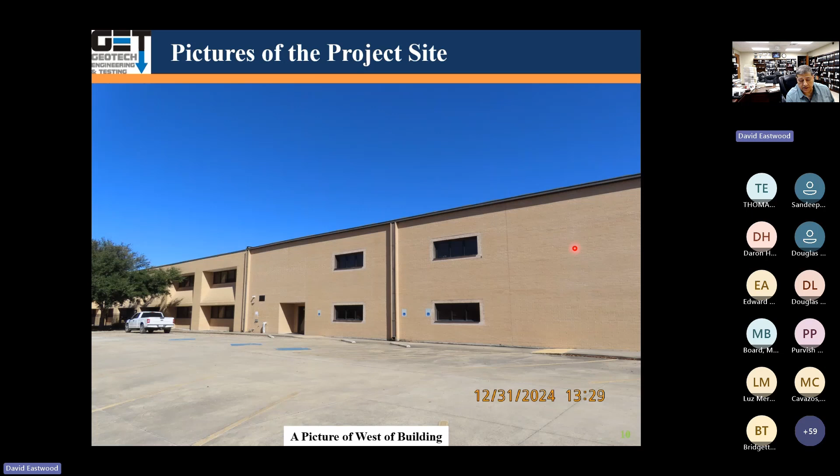If you have questions, again, type it into the Q&A section or chat. The project site is in South Texas. It's an addition to a middle school. Now let's go over the project timeline.

The agenda is the project timeline, site visit, field exploration, laboratory tests, engineering analysis, reasons for distress, repair techniques, and recommended additional studies.

Timeline: they did the initial geotech report in 2008, which was wrong, the geotech report. They did a civil report in January 2009, and all the drawings were done in 2009. The addition to this project finished towards the end of 2009.

We were engaged in December 2024, because the client was saying there were a lot of problems on this building, a lot of cracks and movements. We did a site visit in December 2024 - that was New Year's Eve, by the way. And in 2025, we did a bunch of testing and a report.

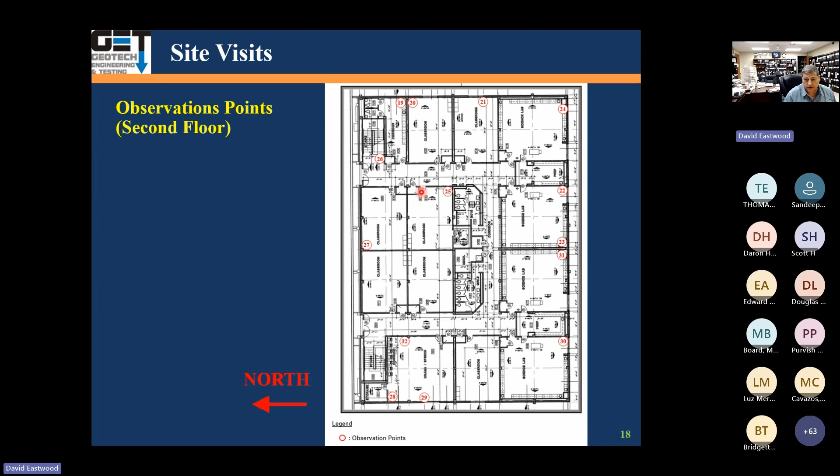So, observations of the exterior of the building. This is a brick veneer structure. The joint spacing in the brick is about 30 feet here.

The brick joint for a typical building like this should be about 20 feet, not 30 feet. You go look at the building itself, some of the sidewalks have heaved up.

We've got negative drainage towards the building, and of course, the gutters are dumping water right on top of the sidewalks. This whole area was wet.

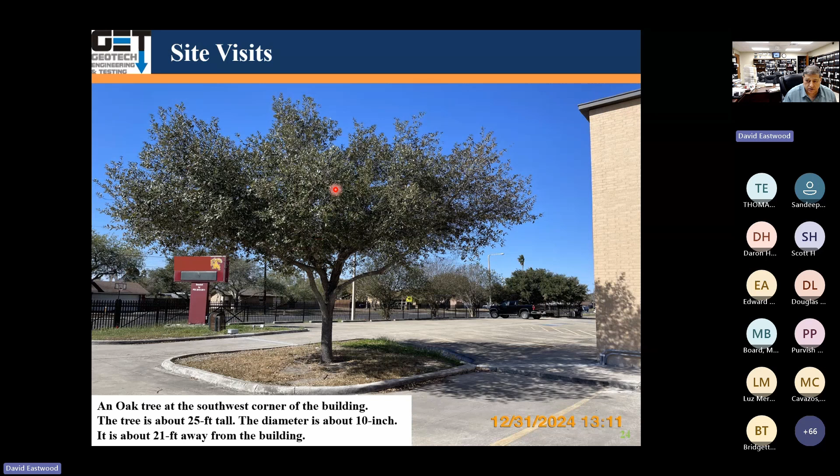There was this little tree out here, not too far from the building. It really doesn't affect it right now - it's about 25 feet tall and 21 feet away. But once this oak tree gets bigger, it's going to cause foundation problems with the building.

If you go outside the building and start looking at it, you see these cracks in the brick, more cracks in the brick.

This is the other side of the building. The brick joint here is about 20 feet, which is fine.

They removed this window frame deal around the building because of the movement - it got loose and fell down, so they didn't want it. If you look at the previous pictures, these window frames have all been taken out. Because of the movement, they were afraid the window frame was going to fall on the kids, so they removed it.

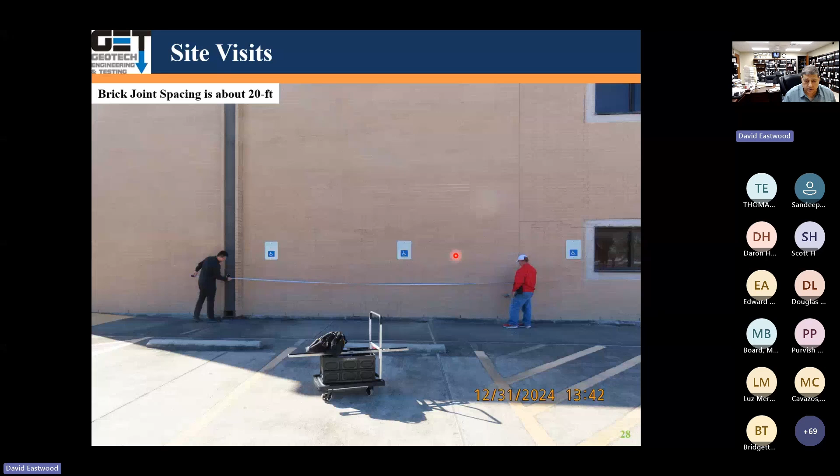Here are typical cracks on the exterior of the building. In the brick, the window frame was removed. Here's another one, window frame removed.

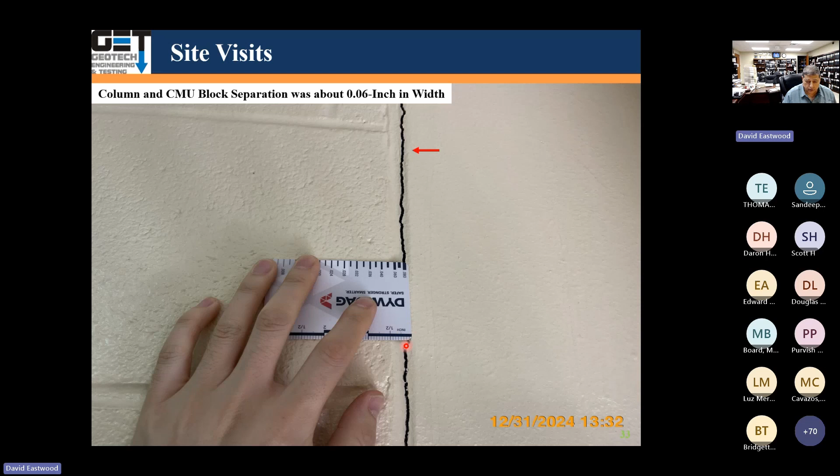Inside was pretty bad. You could see between the column and CMU block joints, a lot of movement. The columns are moving - they're supported on drilled piers. A lot of separation, about 0.06 inch separations.

A lot of sheetrock cracks, CMU block cracks. More CMU cracks. Stair-step cracks through the CMU.

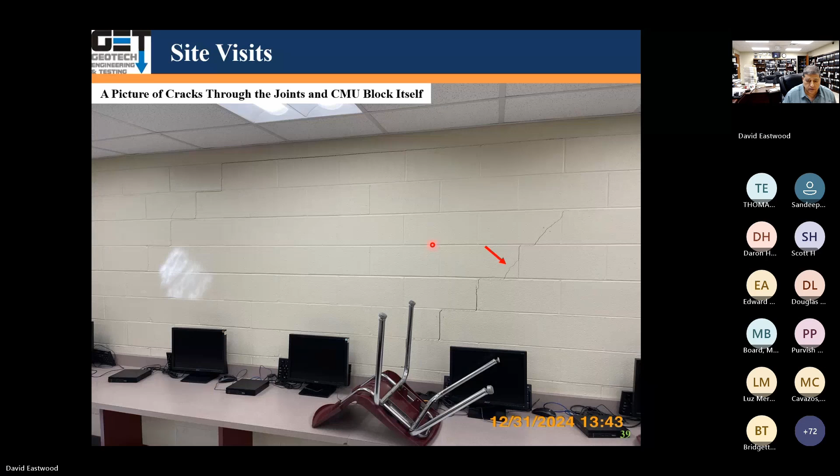Separations again between the column and CMU block. More CMU cracks. You can see more separations here, and more cracks here.

More cracks here. We checked the plumbness of the walls. The walls, for the most part, were pretty vertical - there was some deflection, but not very much.

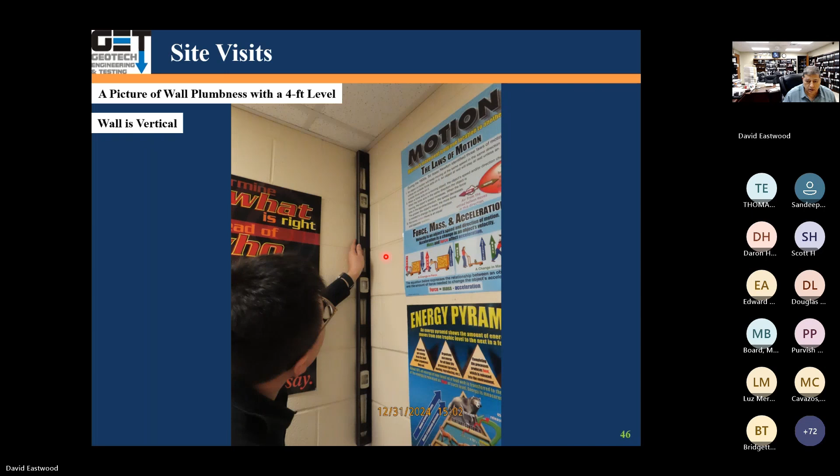Again, we see the cracks, and we check the plumbness. More separations between the columns and the CMU blocks. See cracks right there. Again, here, cracks in the CMU block corner area.

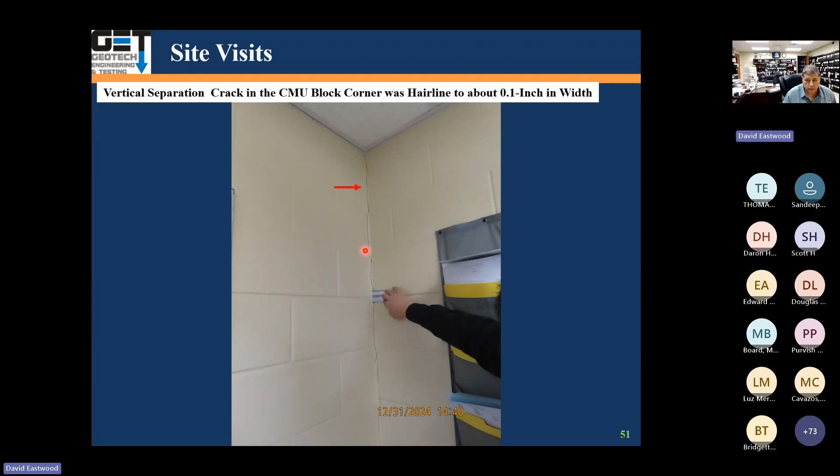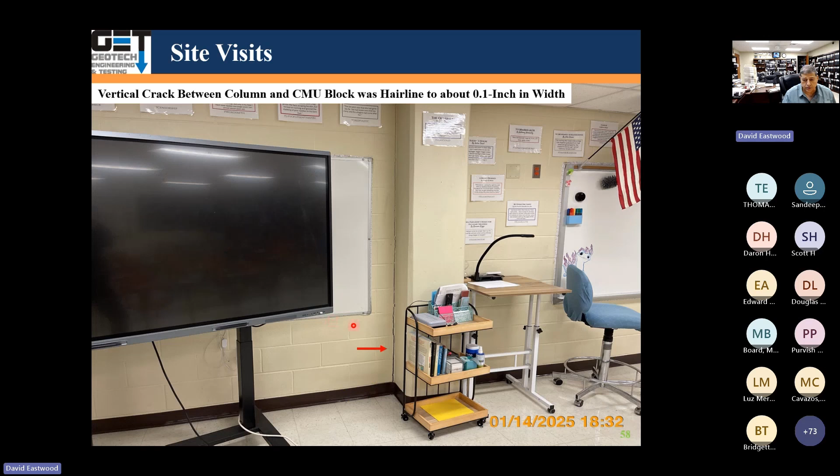See the stair step cracks, separations between the columns and CMU walls, more cracks here in the CMU. See the crack in here. Here again, you can see the separations. More cracks—this was throughout the whole building, first floor and the second floor.

Foundation system consisted of drill piers, a bunch of drill piers in here. Basically, the design was the drill pier with concrete strength of 2,500 psi at 28 days. The geotech said put the piers 13 feet deep. Here we have really fat clay, really hard fat clay all the way down, and of course this is South Texas, really dry.

Underreams here: 16, 36, 18, 50—18-inch diameter shaft, 50-inch diameter bell. Some of them are 24-inch shaft, 60-inch diameter bell. Some are 30-inch diameter shaft, 78-inch bell, at a depth of 13 feet below finished floor. Okay, below finished floor.

The floor slabs had 8-inch void boxes under the floor slabs and in the grade beams, which was good.

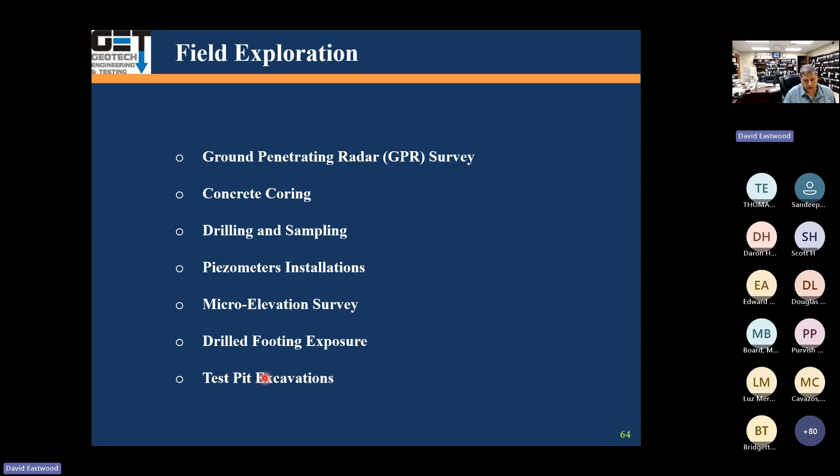Field exploration: we did ground penetrating radar, GPR, concrete core drilling and sampling, installed some piezometers to measure where the water is. We did micro elevations, drill footing exposure, and test pits for the piers and the grade beams.

We did 4 corings of concrete floor slabs, 4 borings inside and 3 borings outside, and GPR at 7 locations where we cored the concrete. These are the borings outside to a depth of 30 feet. The borings inside we tried to get 20 feet, but these 30-foot borings outside were in the parking lot.

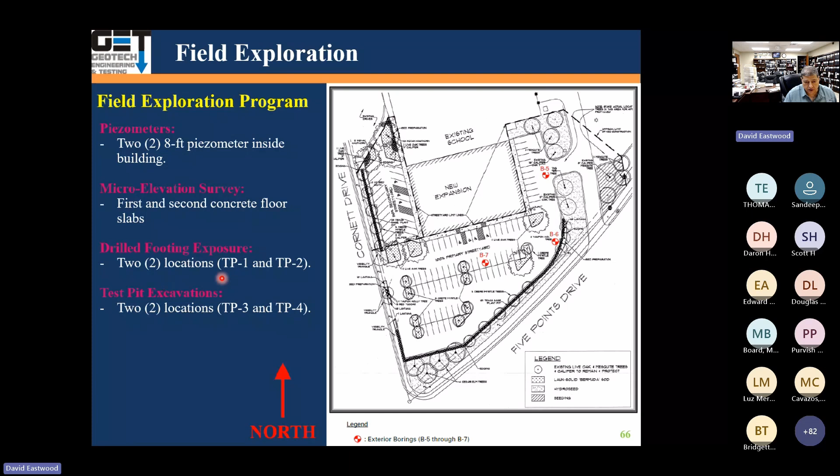They were covered with concrete. Then we had test pit excavations, 2 locations with drill piers and 2 locations for grade beams.

GPR, as you know, basically uses an antenna that transmits electromagnetic energy similar to what cell phones are. It's got a receiver within it, and it receives a reflected signal that it sends out, and when it encounters soils with two different dielectric properties.

GPR was conducted at 7 locations in the floor slab areas to basically perform a standard borehole clearing. It looks like a lawnmower—you just run it on the floor slabs. We did it inside and outside. Here's the GPR doing it inside, kind of locating where the steel is.

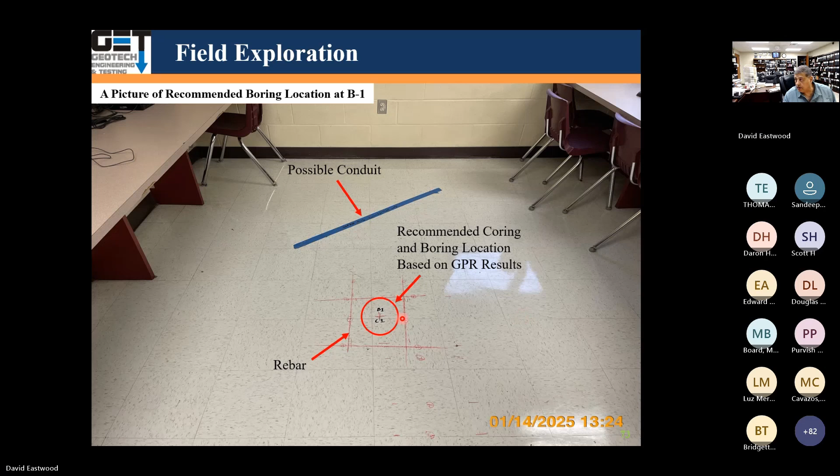This is the hand device. We locate the borings where we don't have to go through the steel or possible conduit, since we didn't want to hit the stuff on the bottom. So we locate the boring locations—again, let's see the rebars in here, conduit.

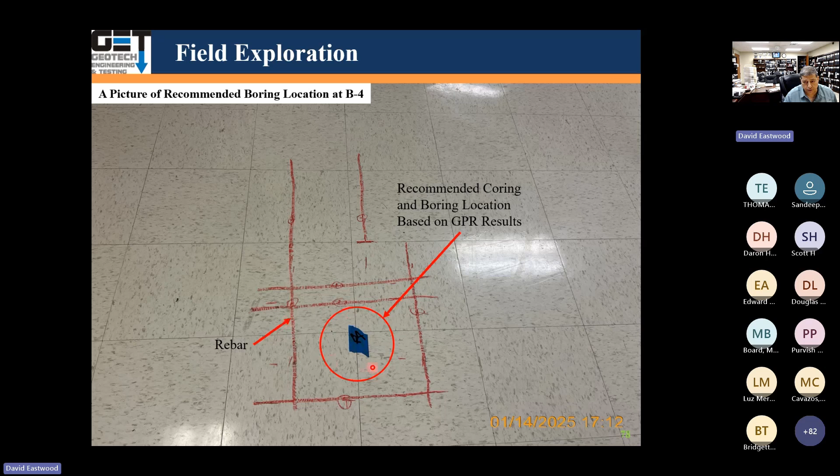Here's another location, this is the boring location, these are the rebars—recommended coring location. Here's another location; the rebars are over here, so we did the borings where there's no rebar. We also did it in the parking lot. Location of the cores where rebars are around it. Here's another location—7 locations total, 4 inside, 3 outside.

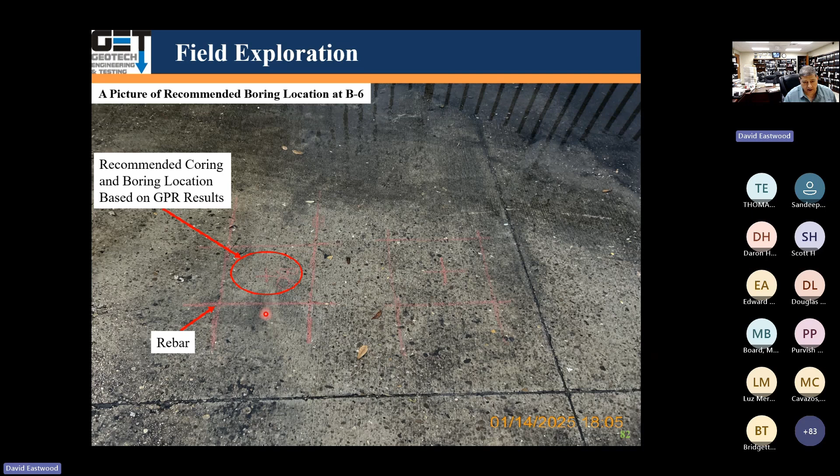4 boring locations inside and 3 boring locations outside. Here's another location. This is where the steel was. This is the boring location.

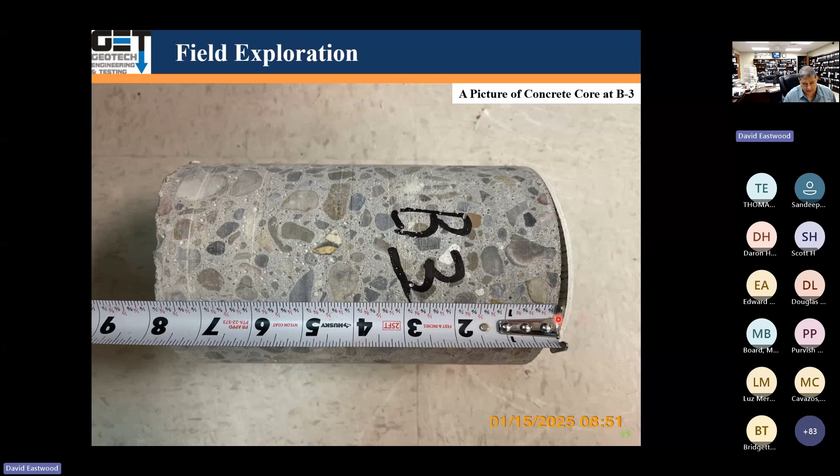Concrete coring: we cored inside and outside with the concrete coring device and got the cores. Here's about 8-inch concrete thickness inside the building—another 8-inch. It's a structural slab with 8-inch voids, and piers are supposed to be 13 feet deep. That's B3. Boring B4, 8-inch. So consistently we had 8-inch concrete thickness inside.

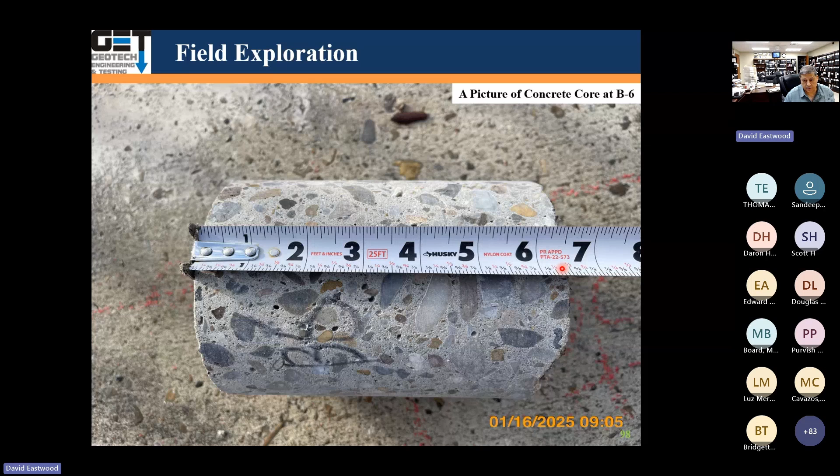This is the parking lot, B5, 6 inches. 6.5, 7 inches outside at B6. B7, almost 6 inches, 5.5 inches.

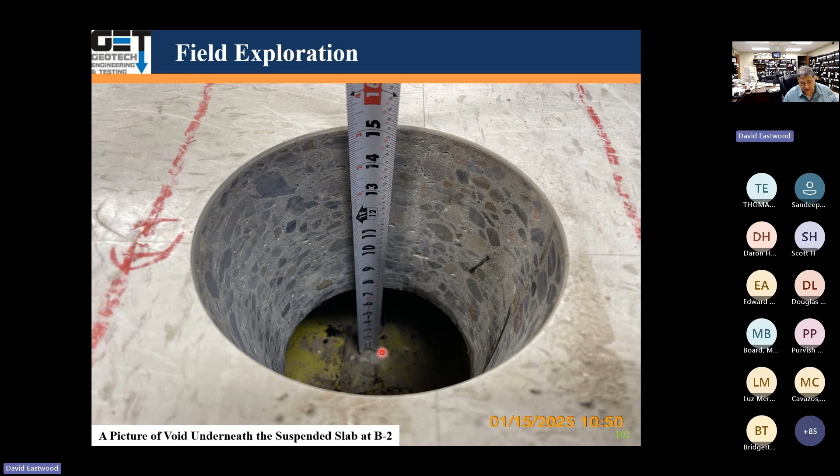Here's about a 7-inch void. So the soil underneath the slab heaved non-uniformly—some areas it moved 4 inches, some areas moved 1 inch. You can see the 7.5-inch void, which means the soil only moved 0.5 inches.

Here's another void, in B3—there's a void under the slab, about 7 inches. Void in B4 is a void, vapor barrier, natural soils—something about 4 inches, 5 inches void. Here it is, about 5 inches.

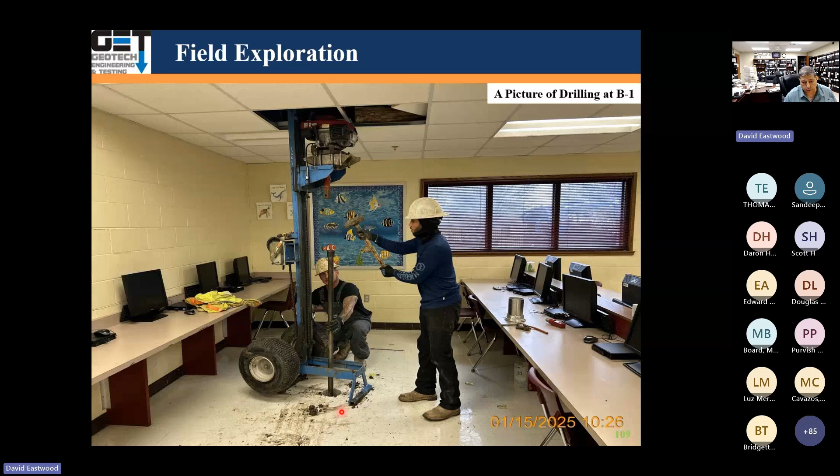After we cored, we did the borings using our portable rig system, which is gasoline operated, to get samples. We measured the water level after doing the borings and didn't find any water in any of the holes.

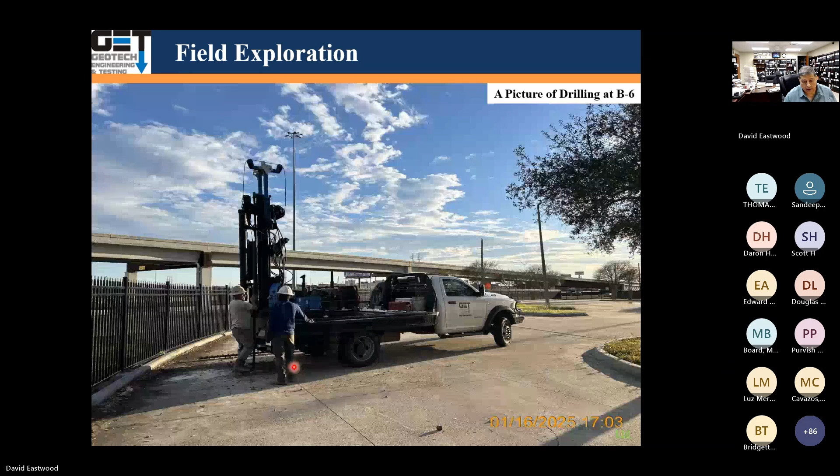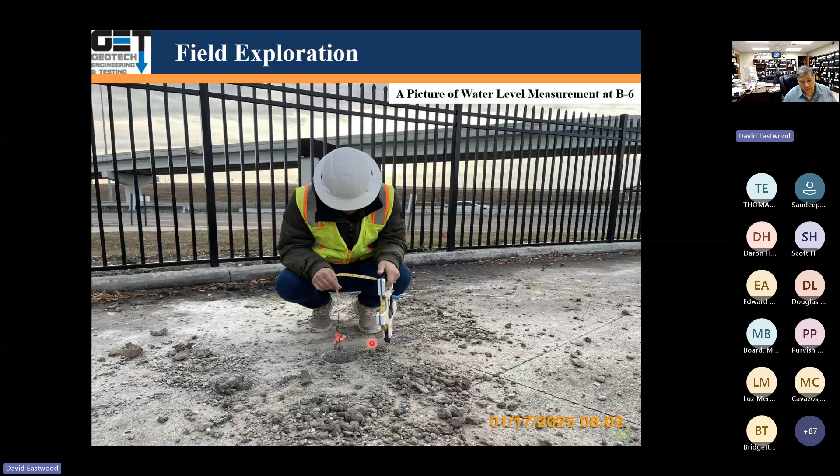Then we did exterior borings with our truck mounted rig at 3 locations to a depth of 30 feet. We got soil samples, and it was all fat clay. We measured the water level and there was no water 30 feet below the parking lot, so the water table here is pretty deep.

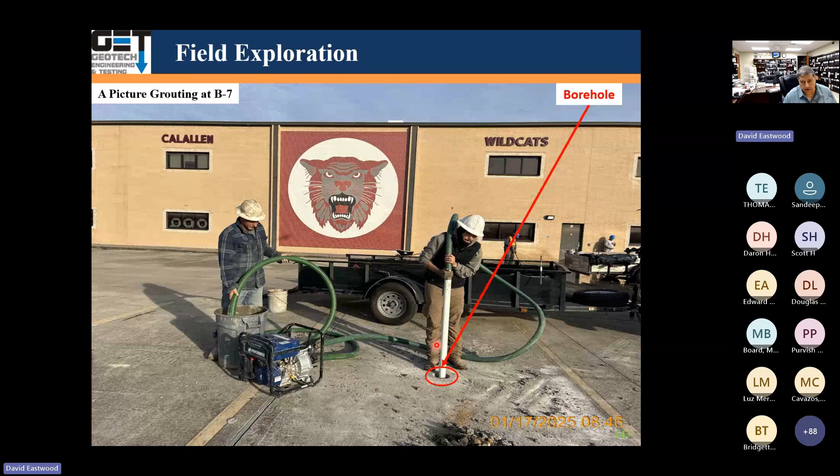At the finish, we grouted the holes with a mixture of bentonite and cement, mixed together, and grouted the holes from bottom up to fill them. These are in the parking lot. We checked with the probe to make sure the concrete was totally filled, and checked to make sure the grout didn't fall out into the holes. That's the grout.

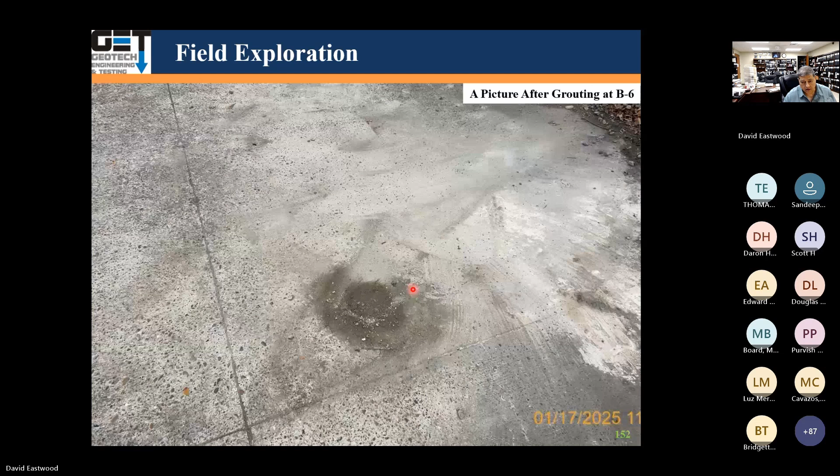We also installed 2 piezometers, one here and one inside the building on the first floor. These piezometers were about 8 feet deep, and we had the screen here. Around it we put sand, and above that we had bentonite, with a cover on it. We didn't find any water in any of the piezometers.

These are 2-inch diameter PVC pipe. We drilled a hole, put the PVC pipe in that was perforated with holes in it, put the piezometers in, put sand around it, then bentonite around that, and put a steel cap on it to measure water levels. You can go back and measure the water levels anytime you want.

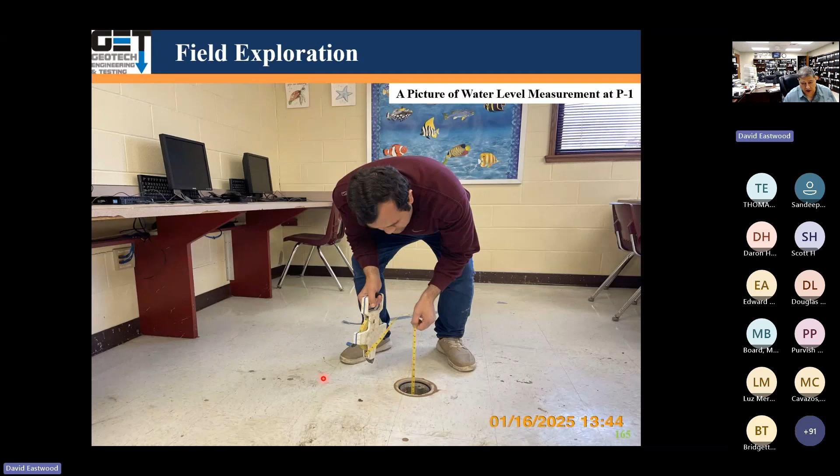They did a leak test on this building, and there was no leak anywhere. We measured the water levels in the piezometers and found no water. P1, P2: dry, dry, dry.

We ran micro elevations to define the deflection on the slab based on what the FPA, Foundation Performance Association, allows, as well as the Post-Tensioning Institute. Here you run the micro elevations and can read what kind of elevation you got.

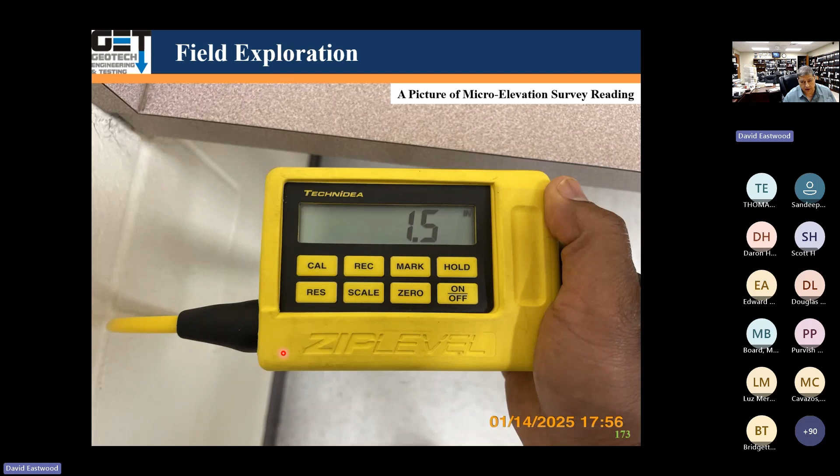We also did elevations of the outside sidewalk to see what the elevations are, and we found out the sidewalk has heaved up on the outside here and gets negative drainage towards the building.

We got a question here: how do you preserve the void below the structural slab when you grout after the coring? You really can't preserve it. If you grout and fill the holes, I'm sure there's going to be a little mound of concrete at the area where we did the boring, so that specific area does not have a void in it where you grout.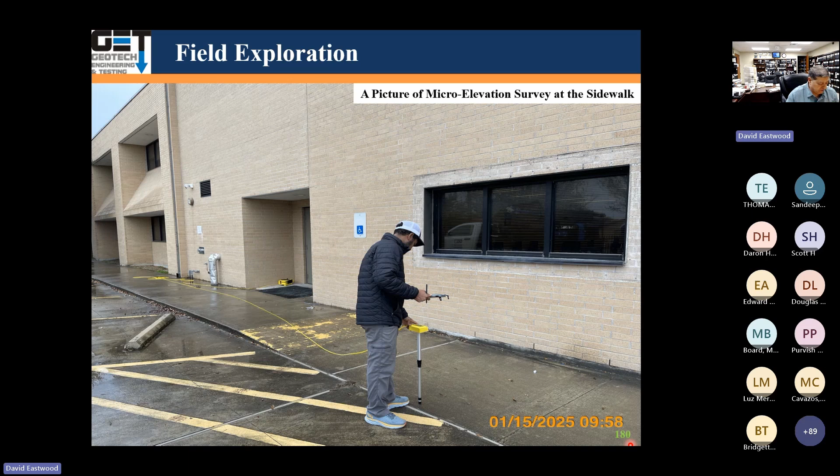Drill footing exposure and test pit locations: test pit 1, test pit 3, test pit 2, and test pit 4. We expose the drill piers, evaluate the subsoil conditions, find out whether or not a perched water table exists, measure the depth of piers, evaluate the bell and shaft size, and identify the integrity of the drill piers. We also did some test pits to measure the grade beam depth and width, what kind of soils you have in the test pits, and if you have perched water there.

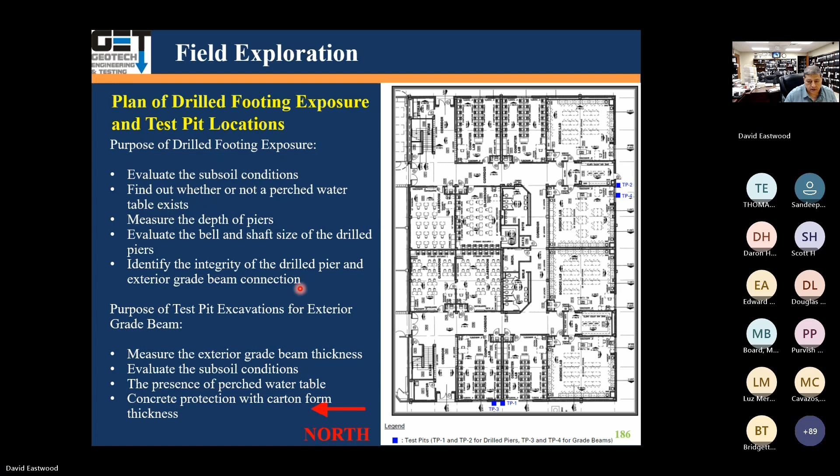So we jackhammer the sidewalks to get holes in there. We start excavating the soils, try to get to the piers, drill some with the drill, and try to remove some of the soils. Drill pier exposure.

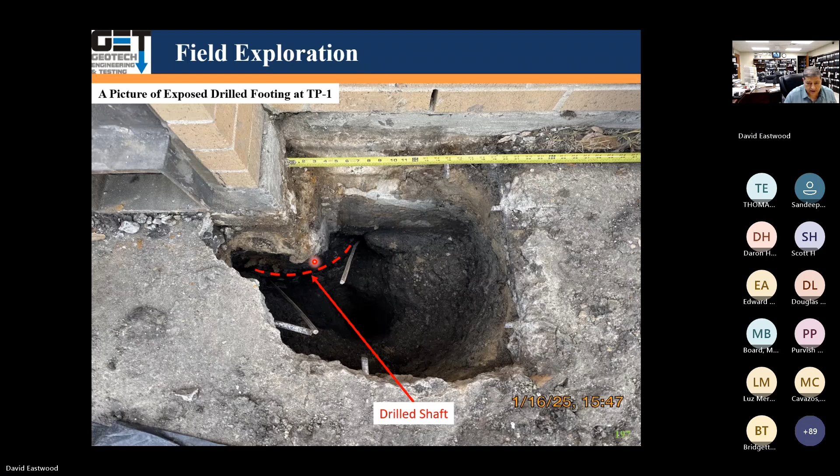This was the drill pier right there under the column. This is the bell. Notice the bell is so close to the pier, so they didn't do a good job of making the bells. These bells are so close to the piers. Here's another drill pier, and another drill pier.

This rod shows where the tip of the bell is. Again, it's pretty close to the pier, which means they didn't do much of a bell.

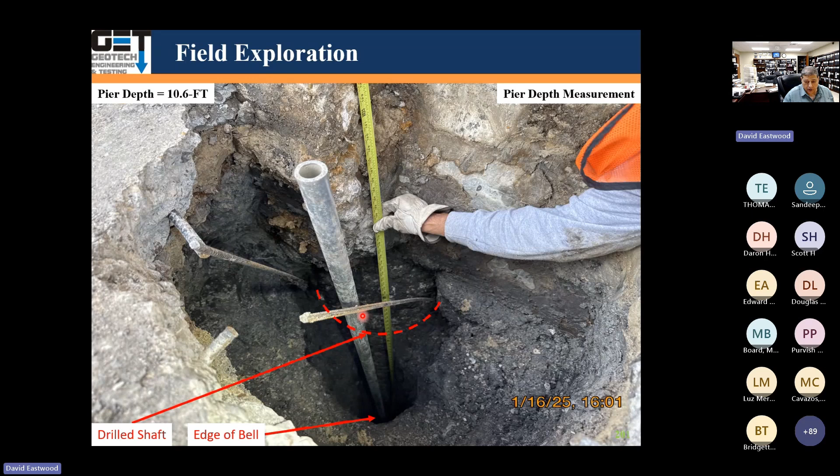That's the edge of the bell right there. Here's the drill pier. This is the edge of the bell, and this is the drill pier. Here's the bell, here's the shaft, and the edge of the bell.

So you can tell here where the bell is. Test pit excavation. In test pit number TP3, we found water at the bottom of the grade beam. Remember, there was no groundwater, so some water was here. We feel this water is from the gutters, which drained directly on top of the sidewalk. The sidewalk joints were open, so water infiltrated through the sidewalks into the natural soils and got wet.

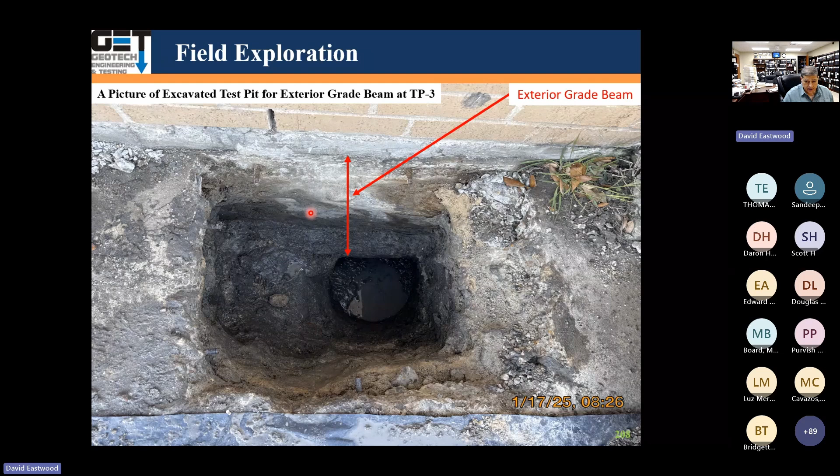So that's test pit number 3. Measure the beam depth. Beam is 30 inches, the exterior beam. Measure the width.

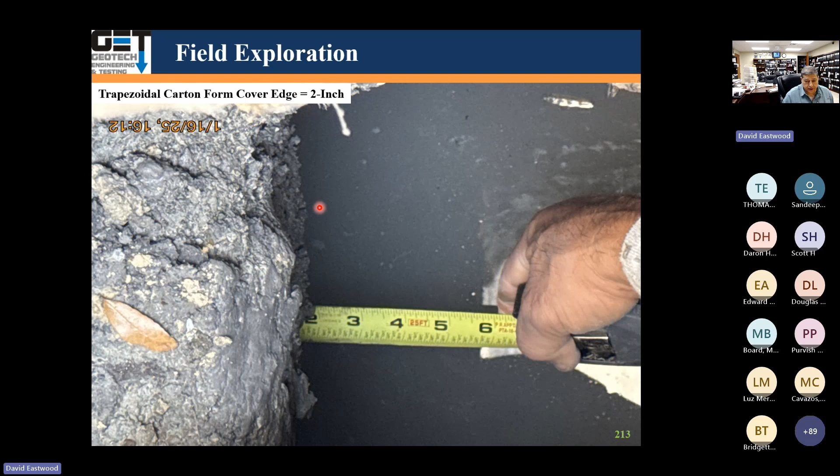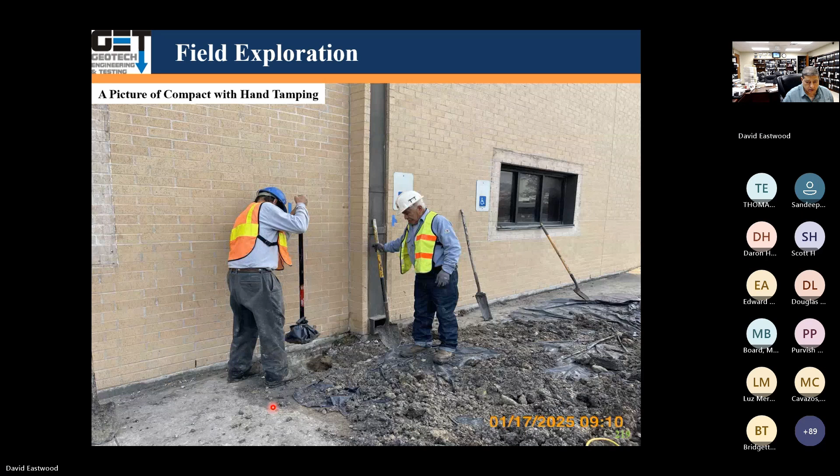Trapezoidal carton form cover edge was 2 inches underneath the grade beams. Here were the void boxes, underneath the grade beam. We backfilled the whole area where the test pits and pier exposure were, with on-site soils, and compacted it. That's what it looked like when finished.

Drill pier exposure, test pit number 1, all the way down was all fat clay, no water. Pier depth was 10.6 feet. Design depth was 13 feet. Bell size was 36 inches. Design bell was 78 inches. Shaft size was 18 inches. Design shaft was 30 inches.

So definitely a construction defect here. They didn't build this according to the design. The design was 13, 78, 30. They totally missed the mark.

Here's drill pier number 2, test pit number 2, all the way down fat clay. Design depth was 13 feet, the pier was at 10.3 feet. Design bell was 60 inches, the bell size was only 36 inches. Design shaft was 24 inches, it was 18 inches. So totally they missed the mark here.

Test pit excavation for the grade beams: 0 to 40 inches was all fat clay. The beams were 30 inches and there were 10 inches of carton void box in there. So the grade beams matched the design.

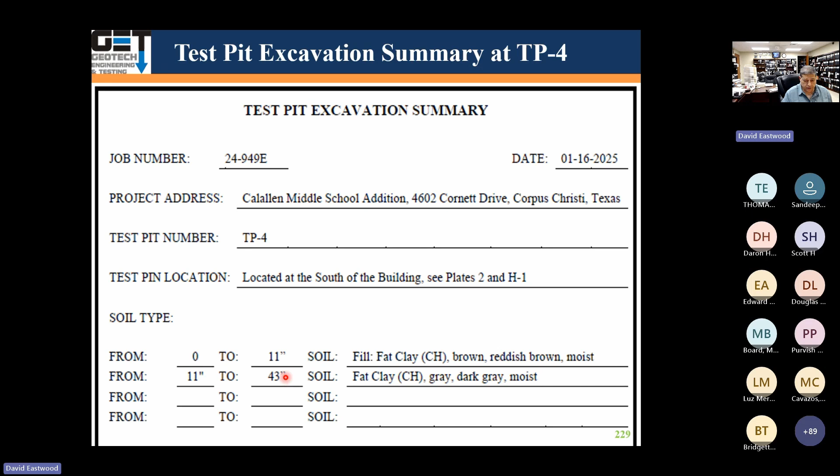That's test pit number 4. All the way to 43 inches was all fat clay. The exterior beam thickness was 30 inches, carton void boxes were underneath. Water was not encountered, there was no water. The concrete carton form thickness was 10 inches.

So no water was observed in test pit number 4, but there was water observed in test pit number 3.

Lab tests: we did a bunch of testing, Atterberg limits, strength tests, and developed the soil stratigraphy. B1, B2, B3, B4 were done inside the building. We found concrete, a void, below that a couple feet of fill, and below that fat clay, natural soils. The fill was all fat clay too. Outside, below the concrete, we found 30 feet of fat clay essentially.

Somebody asked, does the flooring affect the micro elevations? We correct for flooring thickness and change in micro elevation when we do the measurement, so it's net elevation.

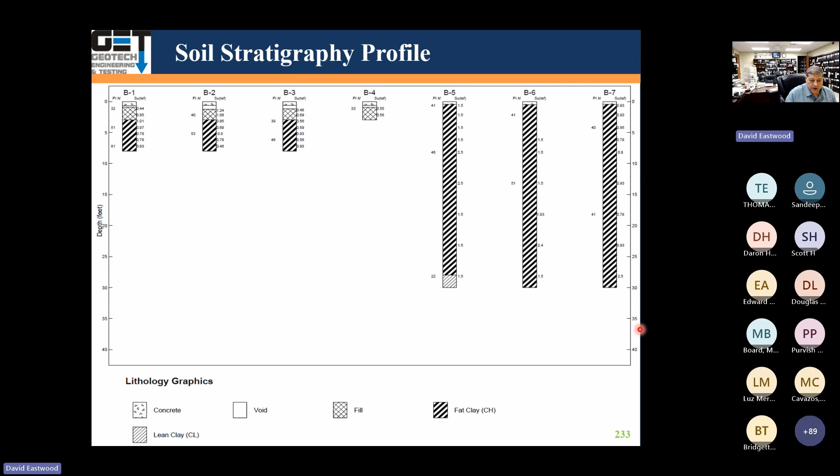Here's another question: so fundamental root cause was negative drainage towards the foundation, which was perched under the piers. That was one causation. The other causation was construction defect - the piers were not the depth or size they were supposed to be. There's a design failure here too - 13-foot piers for these fat clays is not enough in South Texas.

Boring logs, looking at boring B1 inside the building. We had a concrete slab about 8 inches, void 3.25 inches. Below that, we had fill. Below that, we had fat clay.

Boring B2 inside the building, 8 inches of concrete slab, 7-inch void. Below that, we had almost 3 feet of fill. Fat clay with a PI of 46, and natural soils with a PI of 53 all the way down.

B3 inside the building, we have 7 inches of slab, 6 inches of void. Below that, we had fat clay fill. Below that, fat clay natural soils with PI of about 30 and 48. The soil was relatively strong.

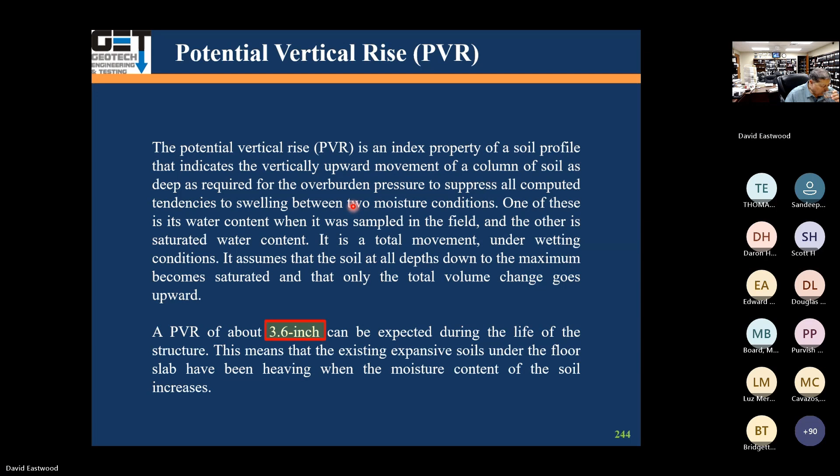Engineering analysis: we look at aerial photos, we look at topographic maps, we look at the micro elevation. We looked at perch water tables, the soil moisture profile, and the liquidity index. We look at the uplift capacity of these drill piers and the depth of the piers. We look at the rainfall data and the GPR results.

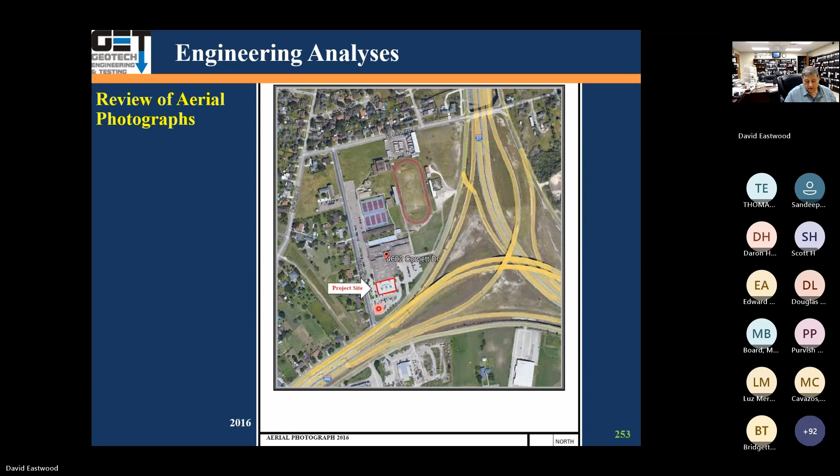Here's a site in 1950. It was heavily wooded. That's 2004, no building. 2009 - see the building here, December 2009. 2011. 2016. 2020. 2024 - we looked at the aerial photo where the building is going to go, it was flat as a pancake.

That's the topographic map. Elevation - we check the elevation based on the FPA, Foundation Performance Association criteria, and also PTI, Post-Tensioning Institute, looking at the guide for performance evaluation of slab on grade foundations as a guideline.

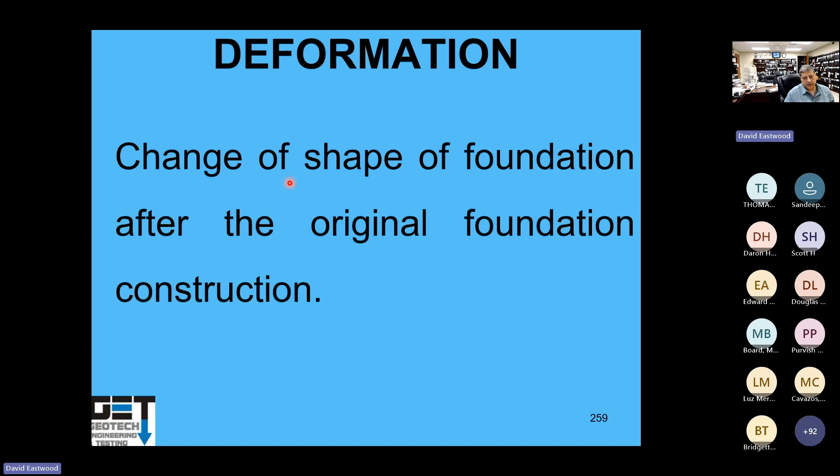Deformation is a change in basically the shape of a foundation after original construction. Deflection is the maximum deviation from a straight line between 2 points. Deflection ratio is deflection divided by the horizontal distance over which the deflection occurs. So if the slab moves like this, that's a deflection, not like this - this is wrong.

This is your deflection. Tilt for your slab is y over x - tilt is the planar rotation measured over the length or width of the foundation system. Allowable tilt is 1% by ASCE, American Society of Civil Engineers, like 6 inches for a 50-foot wide slab.

Slope in a small area is basically the differential elevation between any 2 points divided by the horizontal distance between them. We use the criteria by FPA and PTI, L over 360. We allow 1 inch of deflection in 30 feet, considered allowable.

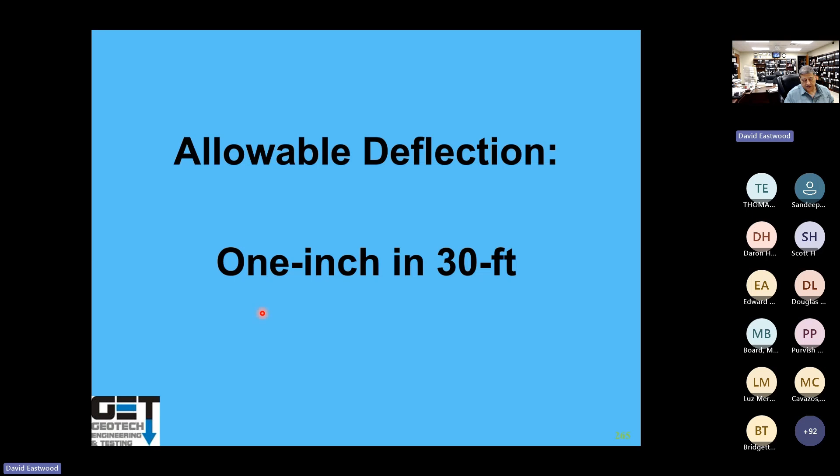So we ran some cross sections on the first floor, section AA and section BB, on elevations. We plotted the slab elevation. We measured the deflections: L over 1097, L over 1099, 1136. They are smaller than L over 360, so the deflection passes, tilt 0.13%, less than 1%.

That's section AA. Section BB, we ran the same way - it's the floor slab deflection. We look at the actual L over 993, L over 1026, L over 1033, less than L over 360. Deflection passes, and the tilt of 0.19%, less than 1%, so it passes.

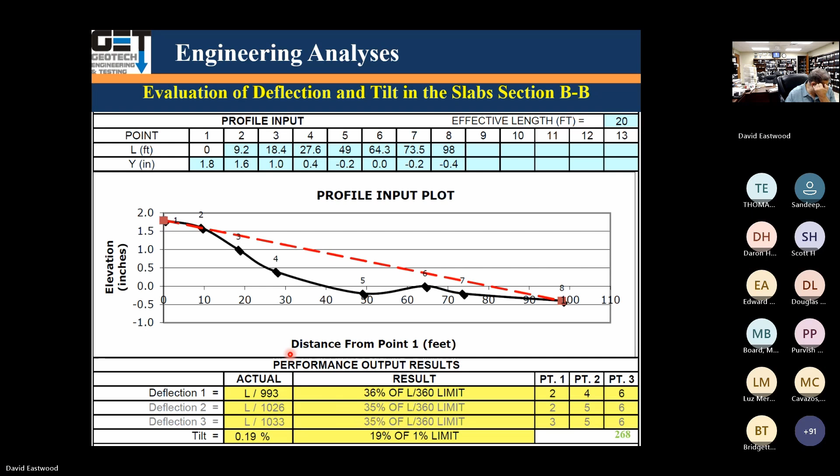I'm going to give you the idea what's going on here. So basically the deflection passes and tilt passes. Allowable tilt is 1%. Allowable deflection is L over 360, 1 inch over 30 feet.

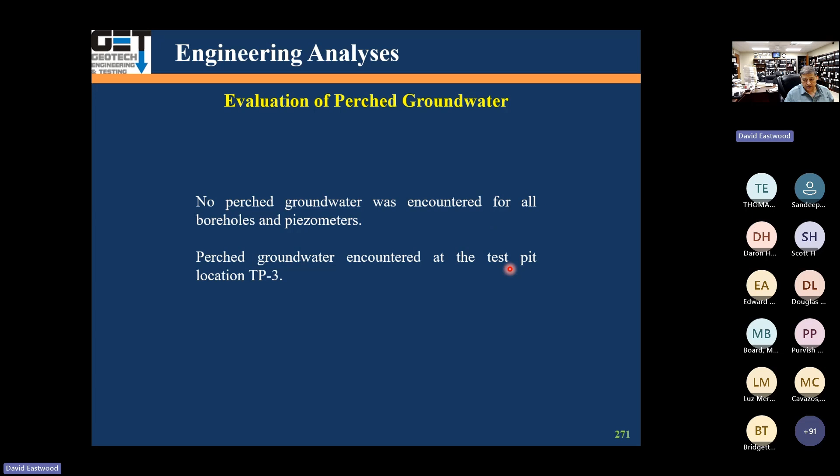We look at the perch water, groundwater. We didn't see any groundwater in any of the borings, but we found perch water at boring B3, test pit number 3. We feel like that water is coming in from the gutters dumping on top of the sidewalks.

So we go all over the place on the moisture profiles. We basically plotted a liquidity index for the borings.

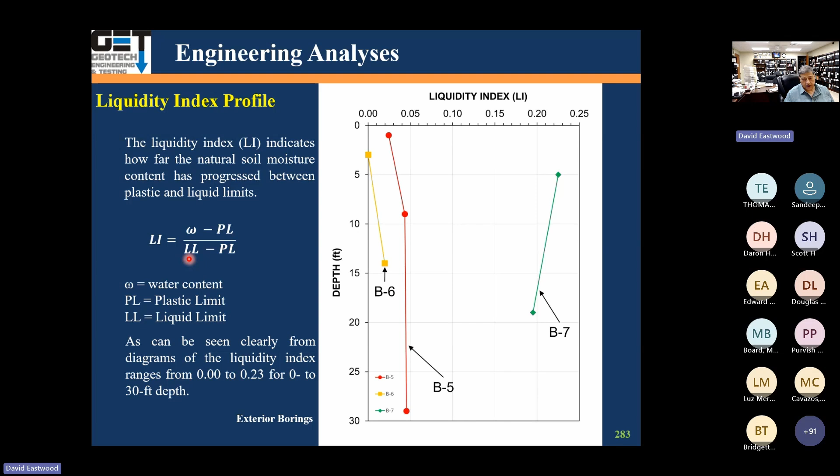The definition of liquidity index is moisture content minus plastic limit, divided by liquid limit minus plastic limit. It's basically trying to find out what the existing moisture content is compared to the liquid limit and plastic limit.

Outside, we found the moisture liquidity index kind of close to 0 for boring B6, and a little bit moist in borings B5 and B7. So outside moistures were generally above dry - just kind of a little bit moist.

Uplift capacity: we used FPA design criteria for calculation of the uplift capacity of drilled piers in expansive soils. If you're a member of the Foundation Performance Association, you can get this software for free.

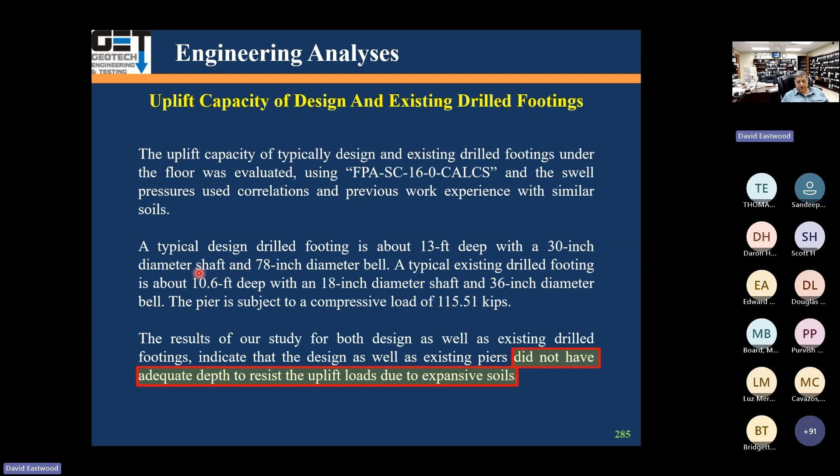Design piers were at 13 feet, but we actually found the piers at 10.6 feet below final finished grade. When we run the numbers in this software, you input the soil profile, what kind of soils you have, the active zone depth, maximum active zone depth, and the column load - we assumed a column load of 116 kips. We put in the pier data with the soil data, where the water level is, and based on that, run the numbers, checking for uplift loading and downward movement.

It failed at 10.6 feet depth for piers. So we check the uplift capacity, and again, downward movement capacity.

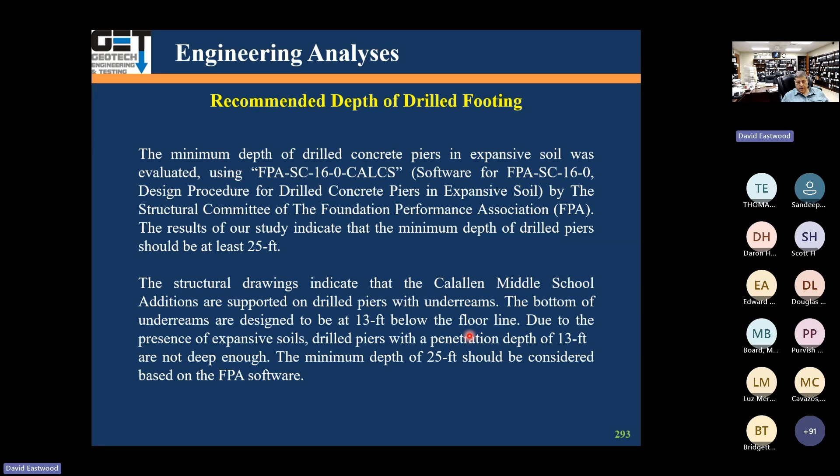Evaluation of drilled footing depths - we checked based on that. We found the pier at 13 feet depth was not enough to resist uplift capacity from expansive soils. You need a pier depth of 25 feet. So we ran the numbers based on 25-foot piers, and it passed.

Uplift loading and compressive loading. We looked at rainfall in 2009. The building was started in 2008 or so. We had 28 inches of rain in 2008. In 2009, 21 inches. In 2010, 43 inches of rain.

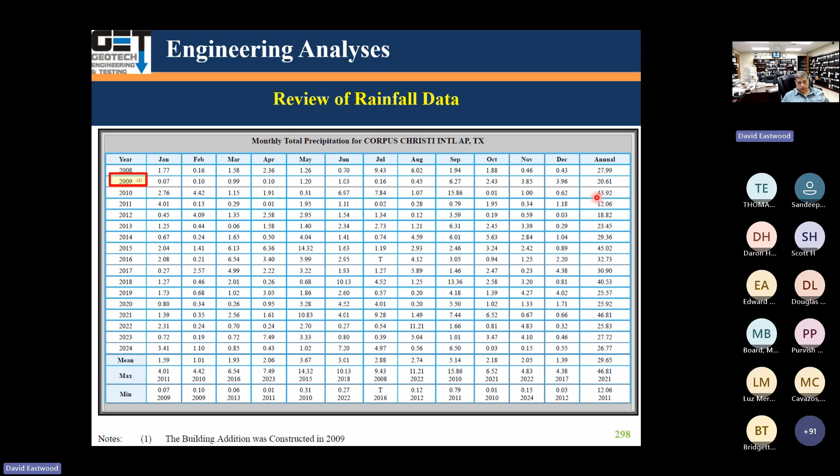So what happened was, when they were building this building, it was pretty dry. The next year it was wet. So if any water got in there, it caused the expansive soils to start heaving up in 2010. That's basically what it shows in 2009, 2010, and 2008.

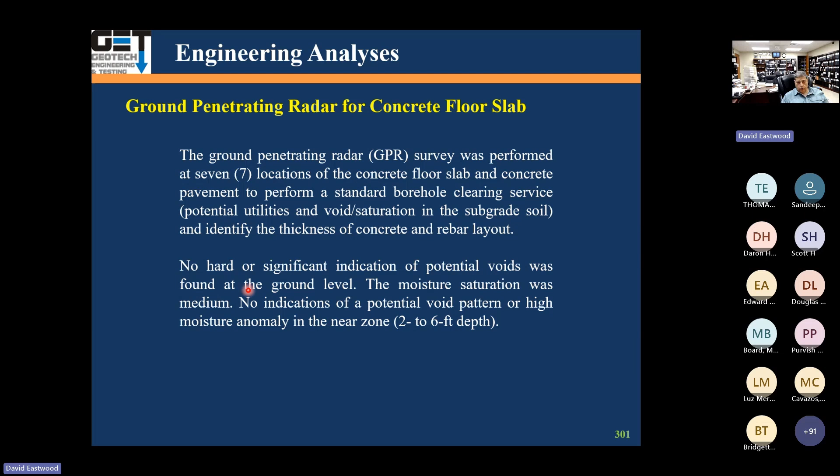We looked at the GPR. We did the GPR at 7 locations - 4 inside the building and 3 outside. We didn't find any potential voids or moisture under the slab areas or the pavements.

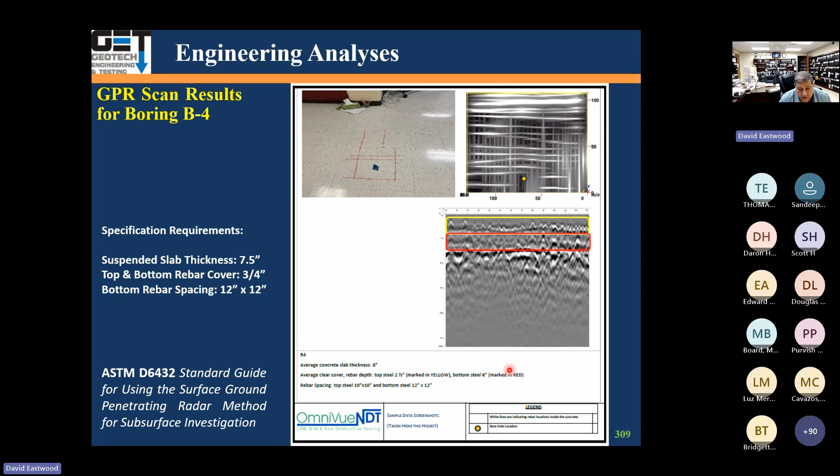Here's boring B4 inside: slab 8 inches, cover was 2.5 inches, steel spacing 12 by 12. That matches the specifications - no voids or anything in the slab.

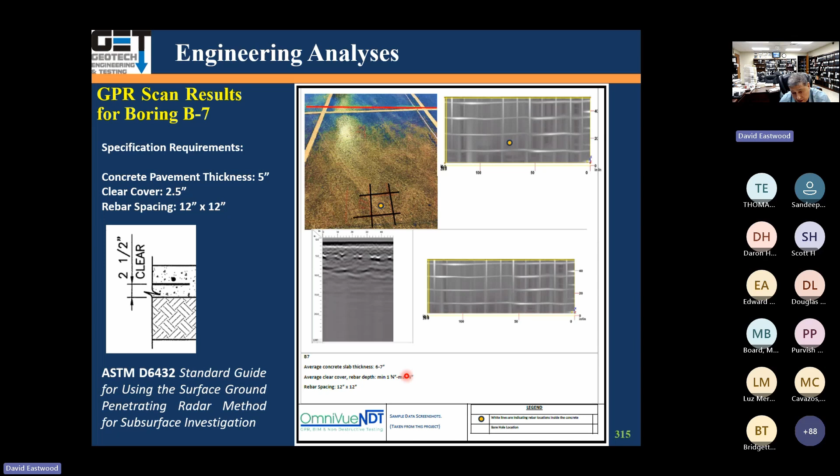This is the boring outside in the parking area. Average concrete GPR said 6 to 7 inches, 1 3/4 of an inch to 4 inch cover of concrete. That means the steel was kind of towards the bottom of the concrete. Steel spacing 12 by 12. No anomalies found by the GPR within the marked blue area.

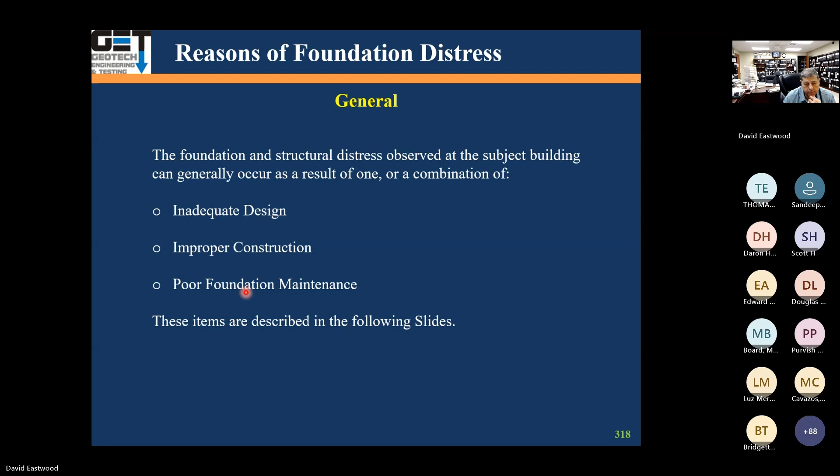Reason for foundation distress: looking at all this data, we found the causation for the distress was inadequate design, improper construction, and poor foundation maintenance. Foundation failure occurred as a result of an inadequate geotechnical report.

The geotechnical report said put the piers at about 13 feet. Well, our actual calculations based on the FPA document say the pier should have been at 20 feet concerning the depth of the active zone and movement on these sites. So the piers were too shallow. It says the pier at basically the geotechnical report says 13 feet.

And improper construction. What the specs call for, the pier is supposed to have a 24 by 60 inch bell. Our measurements showed the piers were 10.3 feet deep and were 18 inch by 36 inches. So they were built not as per the specs.

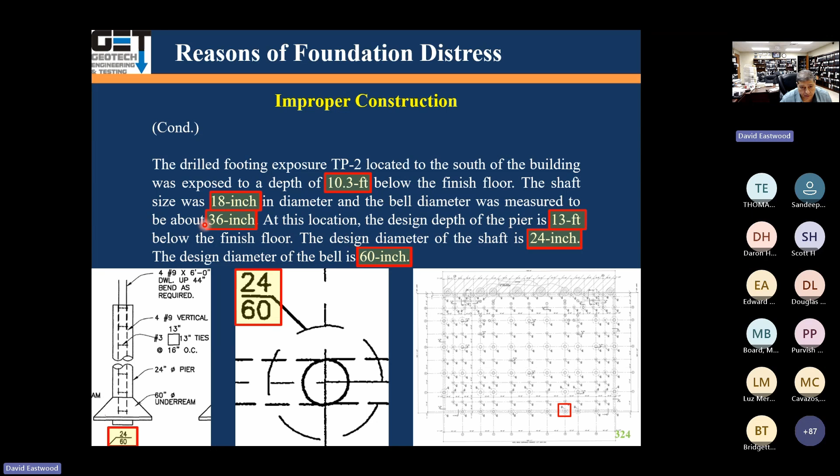Here's another one. Improper construction. The pier was supposed to be 24 by 60. We measured 18-inch by 36-inch, so definitely a lot smaller than the design. The design was 24 by 60, and what we measured constructed was an 18-inch shaft, 36-inch diameter bell.

So we feel like the piers as constructed did not meet project specifications. They were smaller and shallower than what was in the specifications.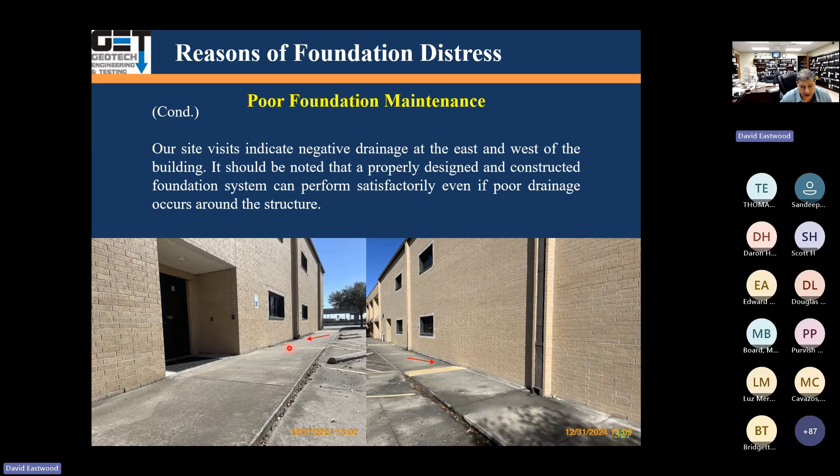We'll look at the sidewalks on the building. Some areas that heaved up had negative drainage. The gutters were draining directly on top of the sidewalks. That was not acceptable. Water was getting into the foundation through these joints, causing heave of the columns.

So in summary: insufficient design depth for the piers, inappropriate constructed depth and size of the piers, and negative, poor drainage.

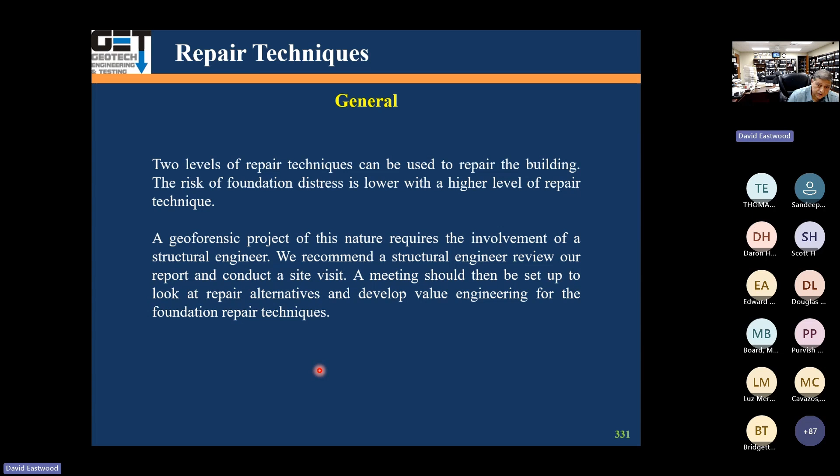Repair techniques. We came up with a repair based on two options, a cheaper option and a more expensive option. The cheaper option was to improve the drainage, fix the sidewalks, and make sure you've got a 2% slope away from the walls.

Then you do chemical injections underneath the sidewalks and the floor slabs inside the building to a depth of 15 feet, trying to get the soil swelling reduced so that it doesn't move anymore. So: improve drainage, fix the sidewalks, get an underground drainage system for the gutters, and do chemical injections to a depth of 15 feet. That's option number one that we should use.

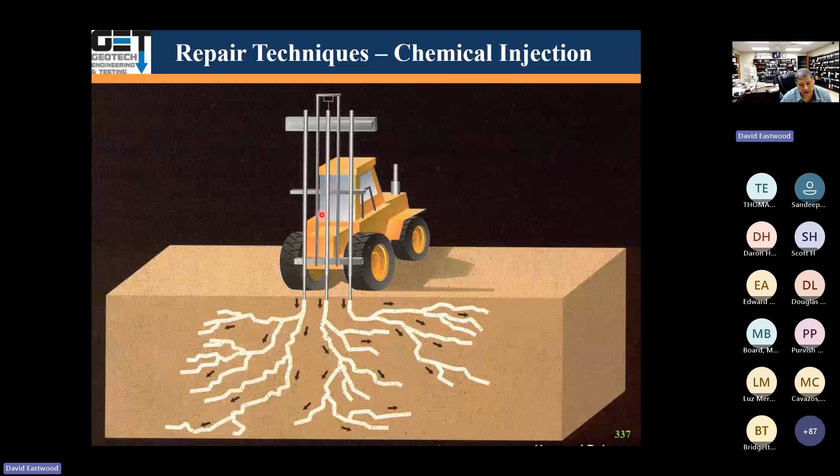Chemical injections basically inject chemicals like light-grade sulfuric acid into the soil. This is a tank where you put the chemicals in. This is the clay layer - it's got a negative charge, and water is positive, so the clay wants to absorb the water. You do a cation exchange, removing sodium and potassium, and put calcium in, so the soil does not heave up as much.

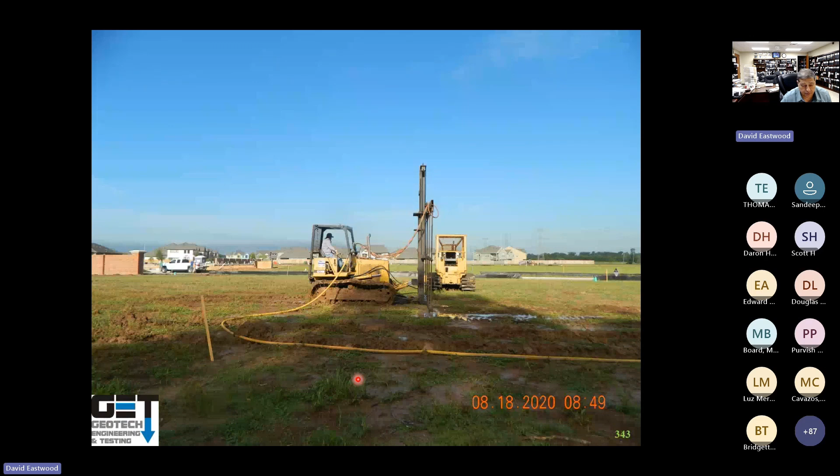So the injection depth should be about the depth of zero movement, which is about 15 feet. If they build a new building, for example, you go out there and do chemical injection to this depth of 15 feet. These chemicals do a cation exchange, and the soil does not heave as much.

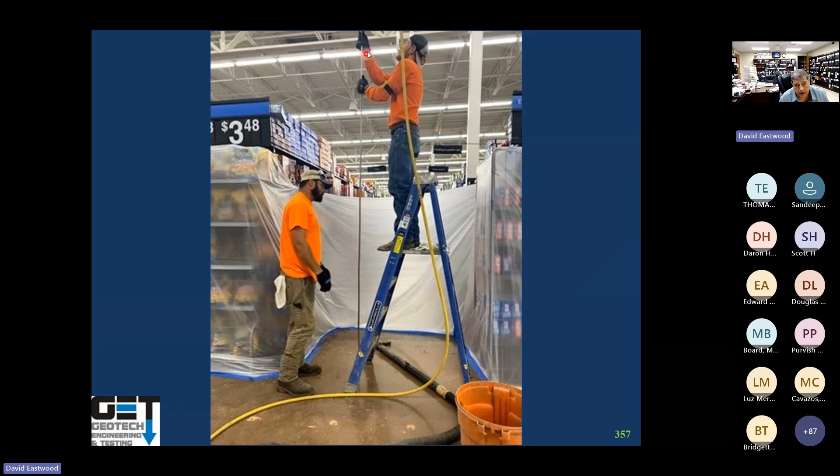You run a swell test after that to verify. This is the hole for the chemical injection. In the interior, you drill holes and inject the chemicals in there, going all the way down 15 feet with this rod, chemically injecting all the way from top to bottom - the chemicals are going in there.

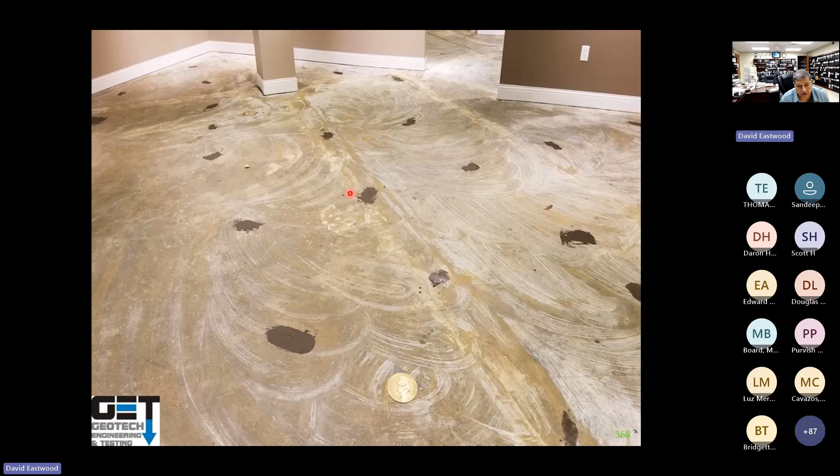These are the locations of the chemical injection. You do outside too, so that the sidewalks do not move.

Level 2. If this system doesn't work, then what we recommended was go out there and improve the drainage, get an underground drainage system for the gutters, and readjust the sidewalks, and then underpin the building and level it using steel pipe piles.

These are basically pipes that are screwed together, and you hydraulically push them into the soil. We say it should be at least 25 foot deep for these piles. Some of these piles come with a system that prevents movement with a collar. These collars go from 0 to 15 feet and basically isolate the steel pipe pile from the expansive soil. The expansive soils move the collar, but not the pipes.

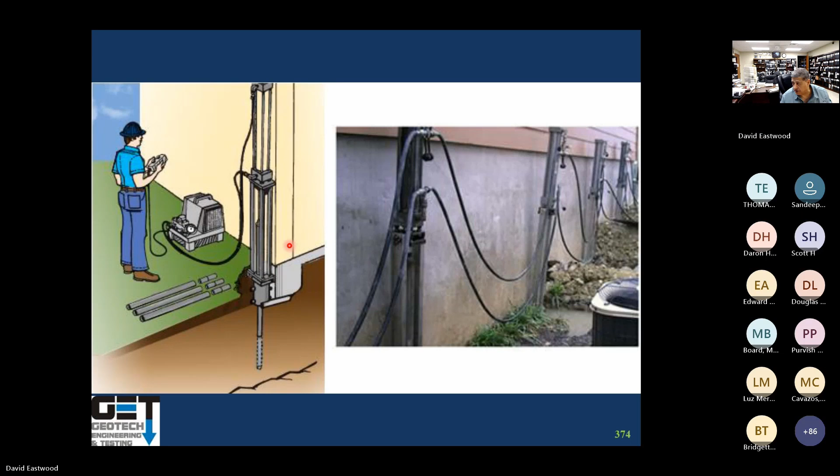You can see that here. You push them in. These are the jacks you put in the pipe piles to level the foundation. You can do it in residential and commercial.

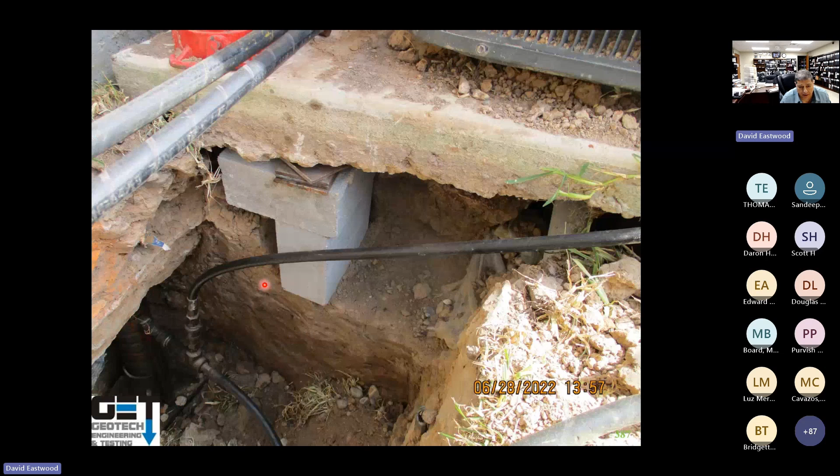When you put these piles in, you have to move the structure all together. So you will have these pipe piles in, and here's the pressure gauges for each location for each pipe pile. You got to control these pressures so that the foundation moves uniformly. Otherwise, you're going to crack the foundation. This is how you put the pipe pile in.

I like steel pipe piles because they got a small surface area, so they will not be picked up by expansive soils because of the small surface area. They're easy to install inside a tunnel under the structure. They're a little bit more expensive than other methods.

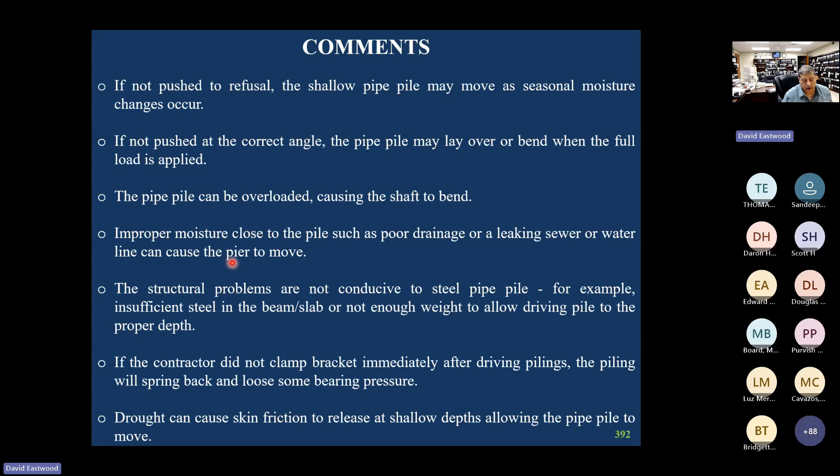Drought can cause problems. No, it won't cause problems because if you push it to the right depth and put collars on it, they're not going to have problems. So a lot of these problems can be mitigated by providing a sleeve over pipe piles within the movement active zone of 15 feet. Here's some pictures of tunneling that you do under the foundations, typically to get access to put these pipe piles in.

They are 3.5 or 4 by 4 feet. You go out there and remove the soils and all that, and you start pushing against the grade beams. This is for press piling pictures. I didn't have steel pipe pile pictures.

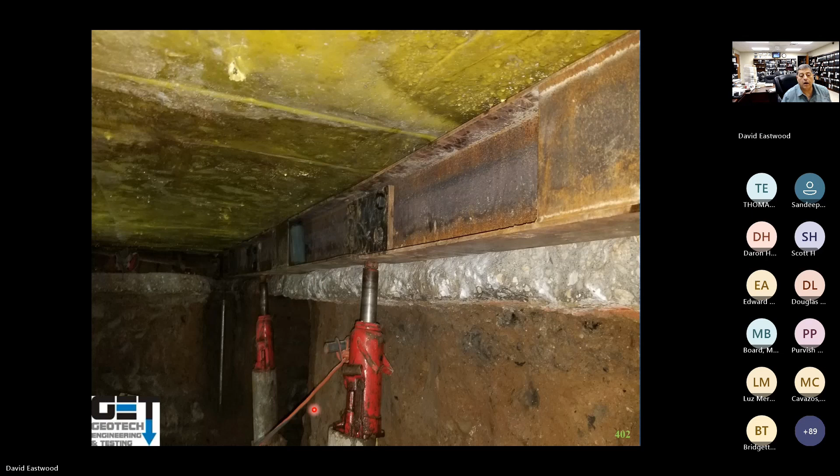Again, if you got areas where you don't have beams, you may have to add a steel beam and jack against it. That's a steel beam. You jack against it.

Comments: despite our recommendations, some movement is going to occur. We recommend after any kind of foundation repair, wait 6 months and go back and remove and replace the bad cracked CMU blocks and bricks. Make sure there's no leak with a plumbing test. A structural engineer needs to be involved with design of the foundation system for repairs.

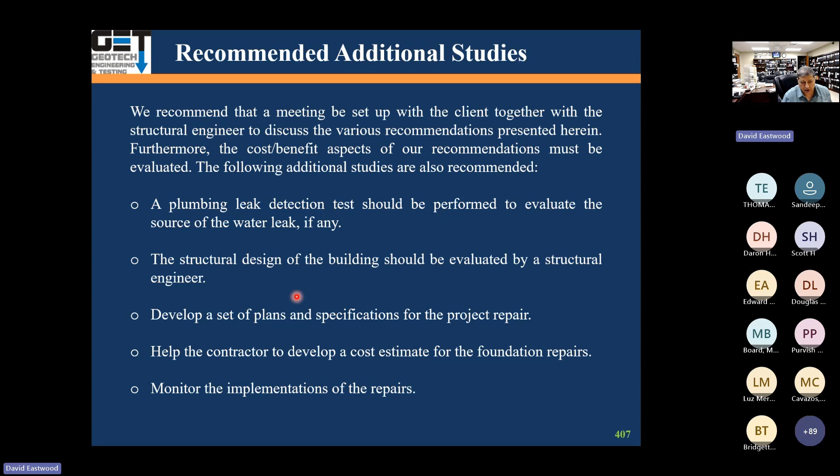So basically, again, we have a case here where the geotechnical report was wrong. The contractor didn't put the right size piers at the right depth, and it caused a foundation problem for a very expensive school. This is a big problem. So original design, change order, foundation repair—it costs a lot of money.